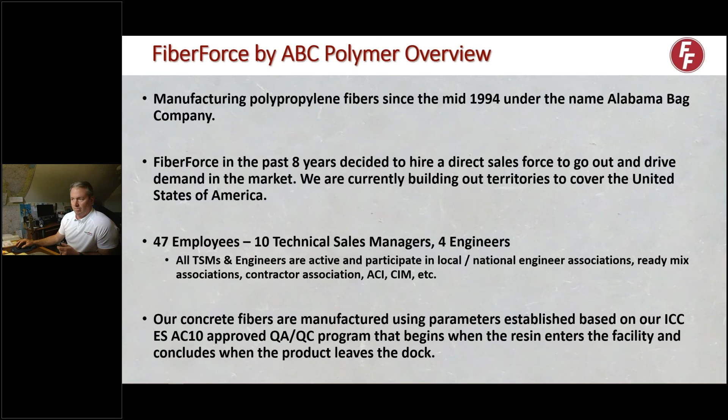We are a manufacturer of fibers, and that's all we do. We've been doing it since the mid-90s. We actually made fibers for most of the admixture companies and just third-party bagged it. But about 8 years ago, the company decided to take a different direction and hire technical sales managers like myself to push the specifications to the design community and to the contractors. So we have 4 engineers on staff along with 10 technical sales managers like myself.

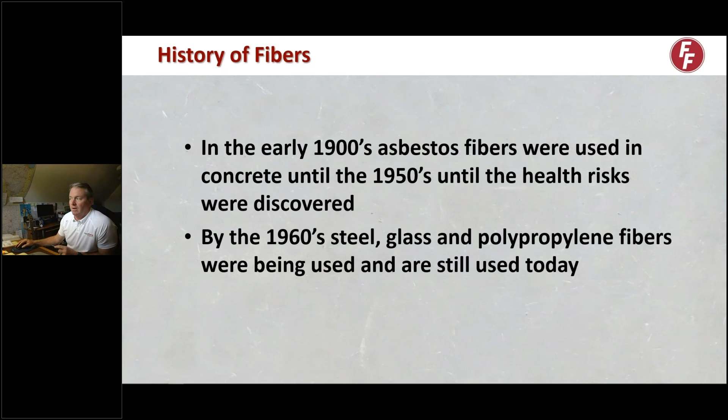But why? Because there are 3 absolutes in life. You will die, you're going to pay taxes, and guaranteed your concrete will crack. There are crack addicts out there that like cracks in their concrete, but most of us would like to control that. So typically, why does your concrete crack?

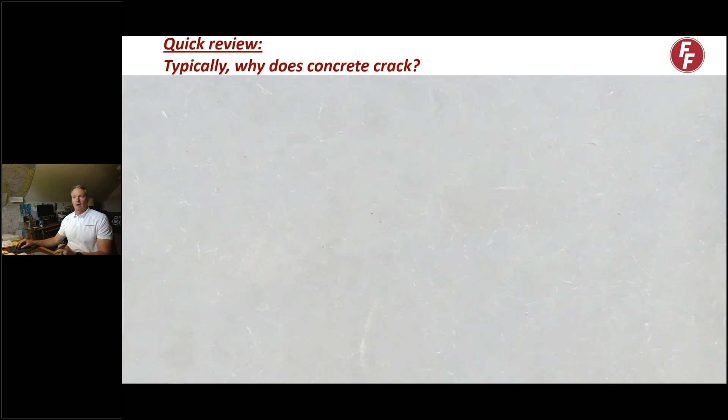There are really 2 main reasons. The first is shrinkage, and the other is restraint.

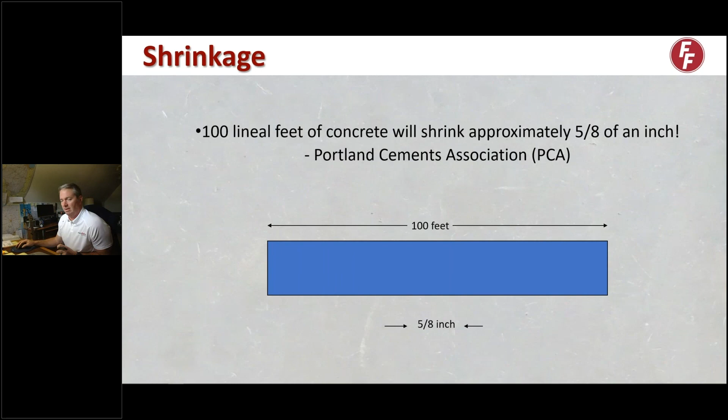So does anybody know this famous quote? Of course, no one can answer me because you're all muted, but it's our friend George Costanza. Basically, what I'm saying here is that the Portland Cement Association, the PCA, says that over 100 lineal feet, your concrete will shrink about 5/8 of an inch. But again, that's not why it cracks.

It's because of restraint. If your slab was on rollers or suspended in space, you wouldn't have cracks in your concrete. Other reasons include water of convenience. If you see a finisher out on a job site with a bucket and a brush blessing the slab, you're going to have some issues on the surface.

Improper jointing, meaning the joints aren't cut deep enough, or too narrow, or too shallow. Also the joint spacing—if it's too wide or too narrow, you're going to have cracks jump out of that joint pattern. We talked about restraint. You've got wind, low humidity that will contribute to cracks on the surface, along with high temperatures. Now I have poor subgrade there, but that's not the vertical cracking I'm talking about with shrinkage. That's horizontal.

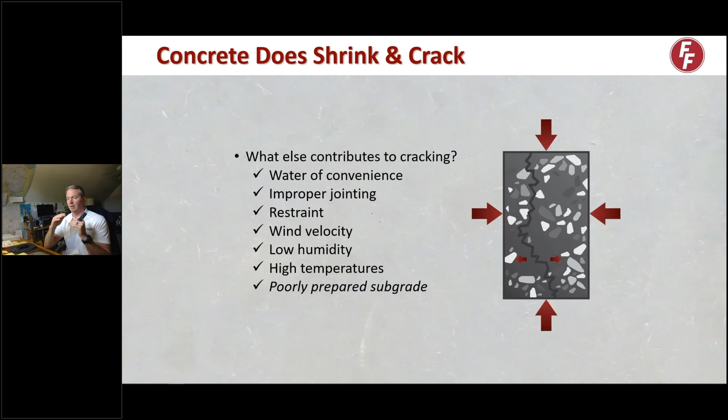But here's my biggest challenge as a territory manager: break tradition. I've got folks that swear they need steel reinforcement in their concrete. The fact of the matter is that on flat work, whether on grade or up on composite deck, the steel reinforcement in that slab is there for secondary reinforcement, not primary. Secondary meaning it is there for crack control and containment.

But why consider fiber reinforcement? I call it the 3 Ps: performance, productivity, and profit. We'll get into these reasons in more detail.

So why are we reinforcing slabs? Again, we're there not to ensure there won't be any cracks, we're just there to make sure those cracks are held good and tight. A big thing in my world as a fiber representative is to extend the joints. Again, we're not there to prevent cracking, but to maintain slab tolerance and impact and fatigue resistance.

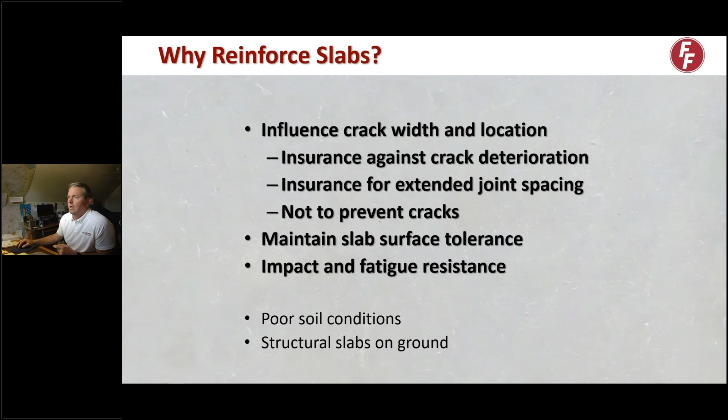When we're talking about impact resistance, shatter resistance, improved fire performance, we see this in a lot of shotcrete applications. What happens there is when water freezes, it expands 9% of its mass. That's why on the bottom of water bottles there are little dimples, so when it does freeze, it expands and doesn't explode that bottle. That's why we put air entrained concrete, or air entrained admixture, in exterior concrete for freeze-thaw. Well guess what? That's the same thing that happens when concrete is exposed to fire. That water or moisture in the concrete will expand and create more of a hand grenade explosion.

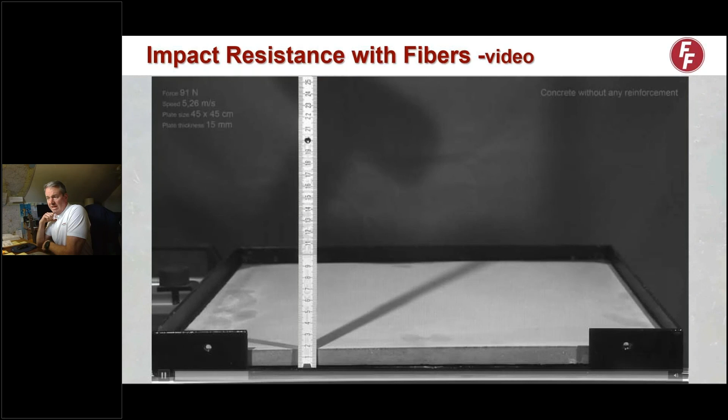So we'll get into some examples there. This is a sample of impact and fatigue resistance. It's a very thin sample, and the hammer is being dropped with just gravity. There are no fibers in this sample, and it kind of looks like that Ford commercial at the end where the logo drops on top of it.

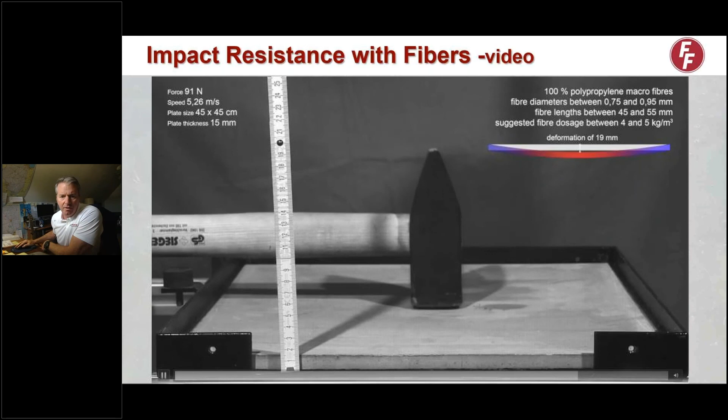The next sample is the same size, but it's got some macro fibers in there. Essentially what's happening is the fibers are absorbing the energy of that impact. So when you take a look at any type of environment where there's impact or fatigue resistance, fibers will help with that in your slab.

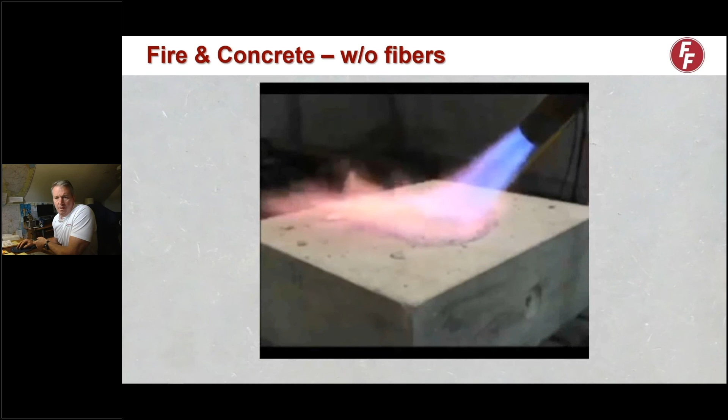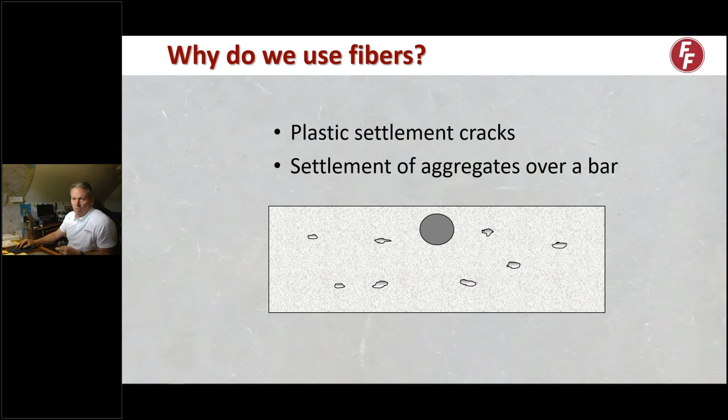Settlement. We also know that with concrete, under gravity, the coarse aggregate will settle. Here's an example of traditional reinforcement where we've told it to go ahead and crack. What we have is a void here, and that's where the moisture will gather and start eating at the steel reinforcement.

What will happen with fiber is you will get a uniform bleed. So if you're on a slab, you're not chasing the bleed water like you typically would with a non-fiber reinforced slab. The other thing is it will take a little bit longer to get the bleed water to the surface - I'm not talking hours, I'm talking have another cigarette and a soda and then get on it, because all that water's got to go around the fibers that are in the concrete.

The Wire Reinforcement Institute will tell you that the traditional secondary reinforcement, the steel, needs to be in the upper third of the slab, and it needs to be uniform. The reason is when the crack happens at the surface, it's looking for relief, so it is looking down. And when it gets on and grabs onto the traditional steel that is in the concrete in the upper third of the slab, it will stop opening up.

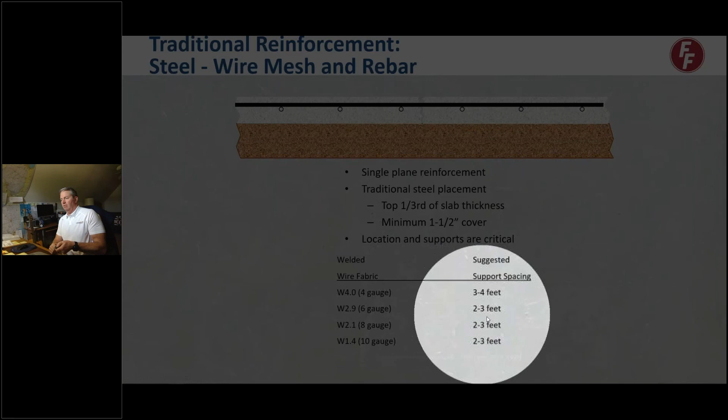Well, in order to get it uniform and in the upper third of the slab, you need to chair the steel reinforcement every 2 to 3 feet, and typically that never happens. Whereas the reinforcement is always at the bottom of the slab, that crack is looking for relief, and it finally finds it at the bottom of the slab. That means the crack has opened up nice and wide for a lot of things to happen.

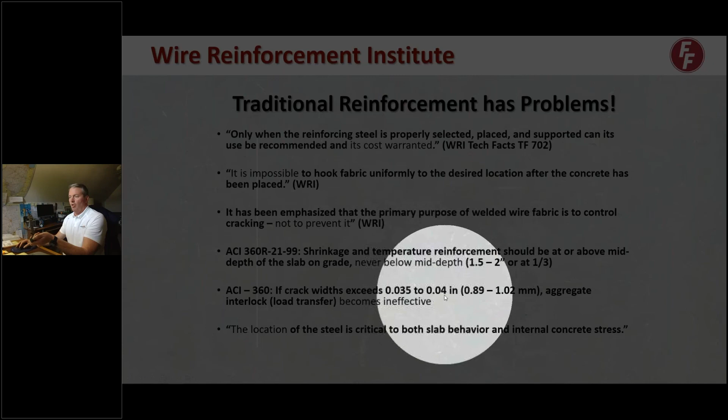What this slide will show you is that ACI 360 says that if the crack opens up more than 0.04 inch, you start losing aggregate interlock. The Wire Reinforcement Institute also says that it is impossible to hook up the traditional reinforcement, the steel. The nub on the end of a come-along, you might as well snip that off, because there's no way you're going to grab that wire and pull it up and have it be exactly in the upper third, let alone uniform.

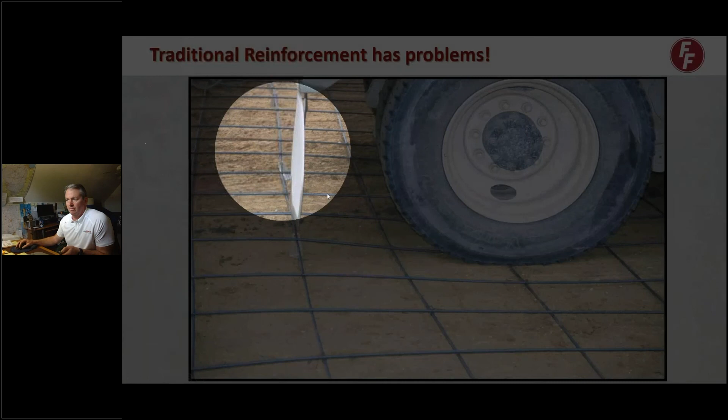So here's an example of a job site. You're going to have construction traffic on it - this is probably a ready-mix truck. As you can see, I'm counting 1, 2, 3, 4 supports. Everywhere else, it doesn't appear that there are any. If you look right there, that support is leaning and probably will fall as soon as the weight of that tire gets on there. Obviously this sample is a poor subgrade issue, but that is something that can happen.

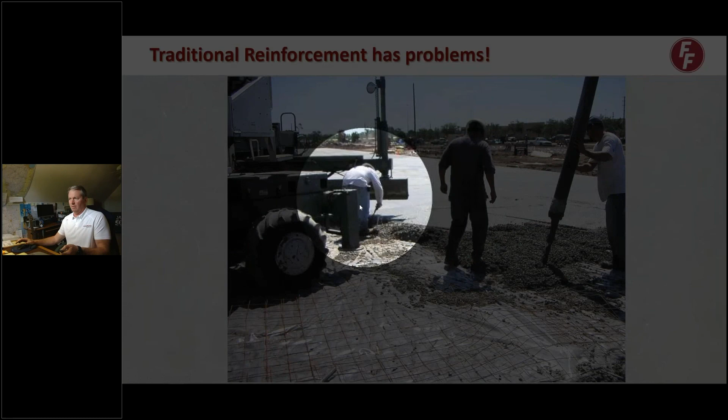This is a laser screed. They're fantastic pieces of equipment - they've really revolutionized the placement of mass concrete. You can really discharge a bunch of concrete in front of that machine and it can blow and go. But unfortunately, in this photo, if you look at this gentleman here, he's got the welded wire caught in his auger, so he's got his tin snips and he's snipping that out.

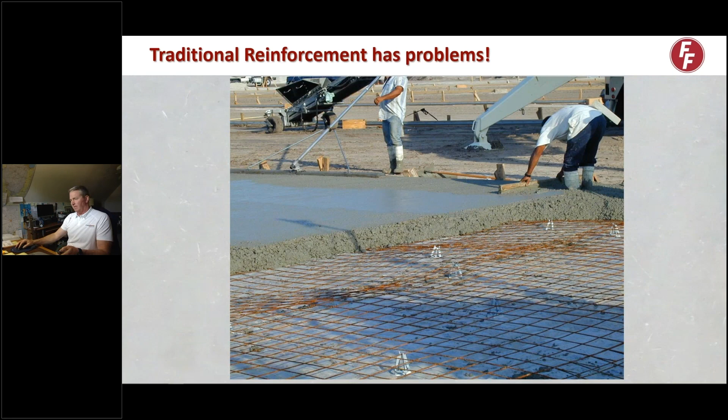And there's some space, so there's not going to be any overlap of the reinforcement. So you've got them just stomping that down and off they go. This looks like a 6x6 square, and that's probably a 4-gauge mat of welded wire, and they're chairing it, but the weight of that concrete is pulling it down. They finally stop trying to wrestle with it, and they kick the supports out, and the laser screed is off and going. So there it is at the bottom of the slab.

This is obviously way at the bottom of the slab, so much that it's getting buried in the subgrade. This is a complete waste of money and isn't doing anything for crack control. It's there because their great-grandpappy and their great-great-grandpappy had steel in concrete to make it stronger, and they don't understand the reason why that is there.

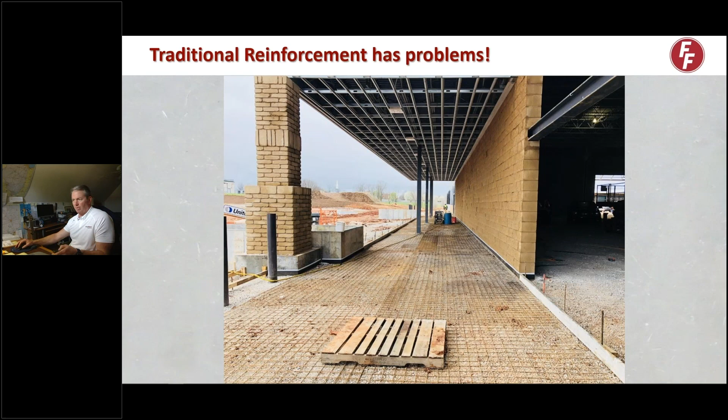This is a Walmart, actually - it's a sidewalk outside of a Walmart. That's a 4x4 square by 4 gauge, obviously very expensive, and it is on the bottom of the slab. I'm not seeing any supports or any effort to chair that properly. And again, complete waste of money.

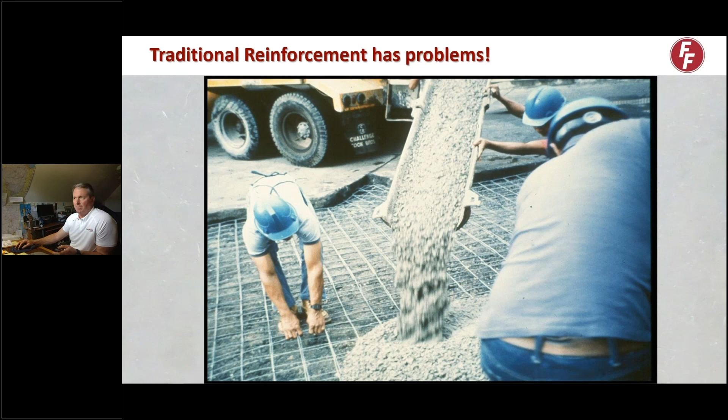Even up on composite deck, they've got supports there, and that 200+ pound individual, when he steps off that welded wire, it's not going to jump back into place. This guy's a chiropractor's dream - he's standing on 2 mats of rebar while he's trying to pull them up. Again, virtually impossible and not going to happen - another example of waste of money.

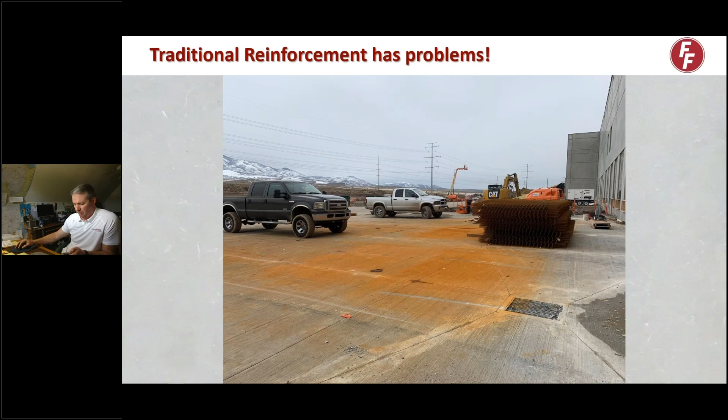This crew decided not to even mess with the welded wire. They went ahead and put it underneath the visqueen - so talk about a complete waste of money. This is a prime example. And I got this because the welded wire is always one of the first things to show up on the job site, and it never is freshly galvanized when it gets introduced to the concrete. In this example here, that rust is going to be virtually impossible to get off that slab.

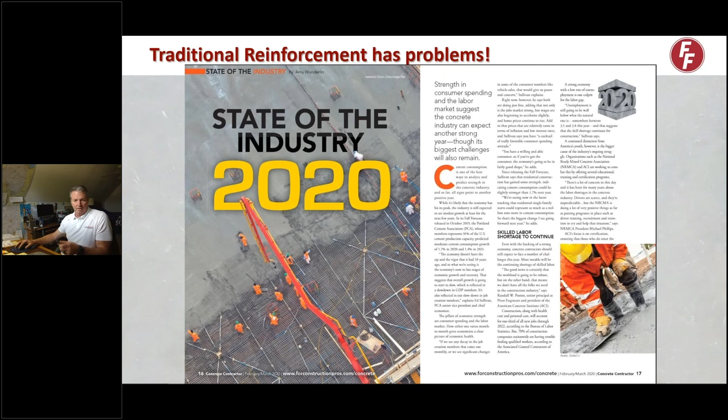This is also from For Construction Pros - it's talking about the shortage of labor. So I'm getting some requests because there is a shortage of labor to go ahead and use fiber reinforced concrete, because they can't find the individuals to come out and either tie the mats of rebar, let alone drag the welded wire and place it on the bottom of the slab. So I guess why deal with those types of issues? Why not go ahead and have it furnished and installed in the ready-mix truck?

It does come in water dissolvable bags, so when it calls for 3 pounds or 5 pounds per cubic yard, if the driver puts in the proper amount of bags, I can put my hand on the Bible and say there's enough fiber in there to satisfy the requirements of the design engineer. ACI 360 does recognize the use of polymeric and steel fibers for well over 30 years.

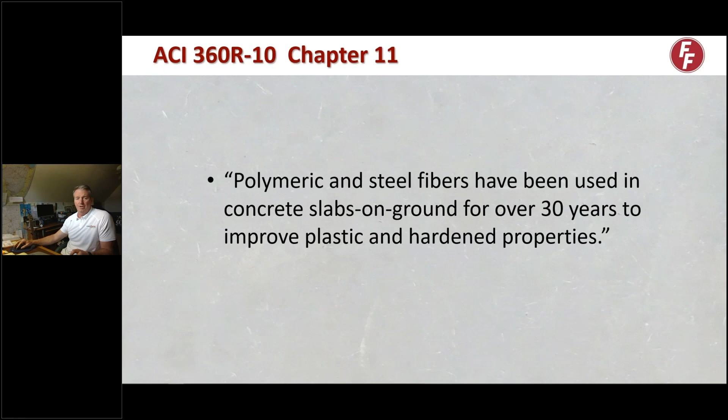But let's go ahead and take a closer look at fibers in the concrete. So if you get anything out of this presentation, just know that there are basically 3 types of fibers: a microfiber, a macrofiber, and a steel fiber. Micro, macro, steel. Now, when you take a look at the micros, there are 2 types of micros.

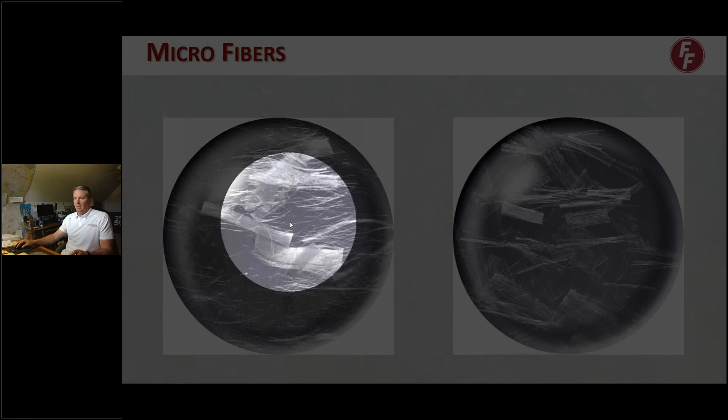There is a monofilament, which is this sample over here, and essentially the fibers are mono, meaning singular, and in a microscope they look like a smooth dowel. So you and I, pulling on a smooth dowel, it's going to come out of one or both of our hands, and that's what it does in the concrete. Typically I see the dosage rate for the monofilament at 1 pound per cubic yard, and the applications are such like a garage slab or a basement slab. Now this other sample to the right is a fibrillated fiber, and as you can see, it's like an accordion.

As it gets mixed through the concrete and grabs onto the coarse aggregate, that accordion expands. At 1.5 pounds, the fibrillated fiber can replace the 6x6 W1.4 or the 10 gauge welded wire. That's where I'm seeing the 1.5 pounds of fibrillated fiber being used: sidewalks, driveways, those types of applications. So remember, micro, macro, and there are 2 types of macro.

There's the tape fiber, which is this sample over here, kind of looks like shredded masking tape, and then there's the stick fiber. The tape fiber, typically the minimum dosage rate we see is 3 pounds, and at 3 pounds per cubic yard I can replace 6x6 W2.9 by W2.9 or the 6 gauge welded wire. The recommended dosage rate for a macro or tape fiber is 3 to 5 pounds.

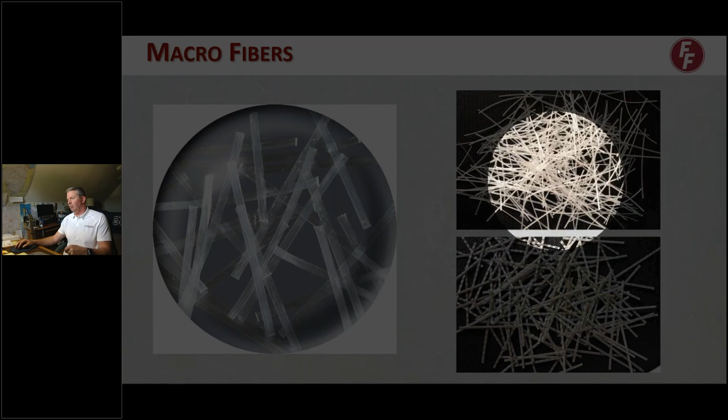3 pounds is about the size of a couch pillow. Once you start getting into the 5 pound range, there could be some mixability issues and finishing issues that might steer you towards the stick fiber, which is this over here. The dosage rate I see utilizing the stick fiber is 5 to 10 pounds.

When you're talking to your ready mix producer and you're at the 5 to 10 pound range, there's got to be some discussion with the QC department on the mix design to make sure the mix is optimized to the use of macro fibers, and that's where your fiber representative can help you out.

Micro, macro, and steel. Like the micro and macros, there are 2 types of steel fibers. There's the type 1 fibers, which are these 2 here, and there's a type 2 fiber. The type 2 fiber is a stamped fiber, and I typically see that in light commercial applications. Minimum dosage rate for steel fibers is 25 pounds per cubic yard.

With that stamped fiber, if you take and bend it in your fingers, it'll bend and break real easy, and that's where I see it used in light commercial applications. Whereas the type 1 is a cold drawn steel fiber, and I see that in more heavy industrial applications. Taking that in your fingers and trying to bend it, it's very, very difficult. So I see that like in steel mills.

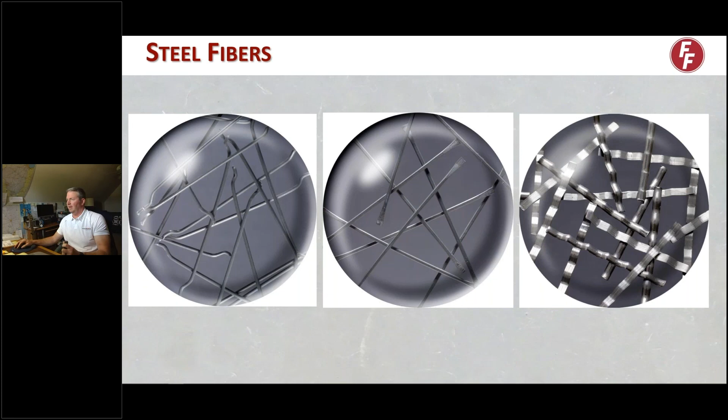The most I've done is 89 pounds per cubic yard. My European counterparts kind of laugh at that because they're over 100 pounds per cubic yard. But they also don't utilize the macro fibers as much as we do in the States, and they're more accustomed to mixing and finishing the high dosage of steel fibers.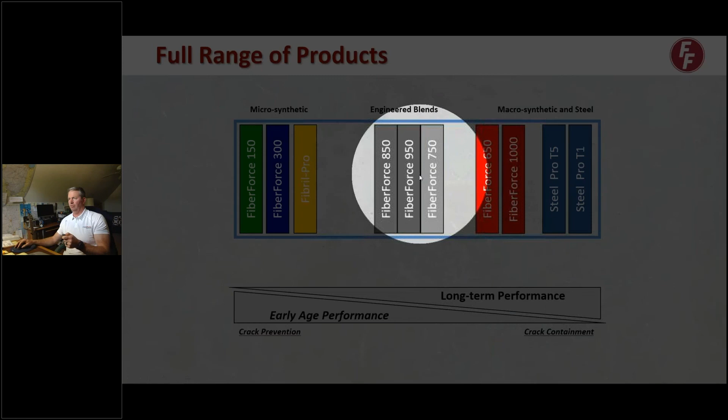When you take a look at the line of fibers, again, micro, macro, steel, there are some blends, which basically take a look at the micros having the early age performance, the first 24, 48-hour temperature plastic shrinkage, and then you've got the long-term performance, which is the crack control and containment. With the engineered blends, you get the best of both worlds, the micro-macro blend or the micro-steel blend.

Again, there's no obstruction to the sub base. It's ease of placement, you can go ahead and discharge your trucks right on grade. Safety is a big thing. You've got your EMR ratings that facilities such as BP, Eli Lilly, ArcelorMittal require your EMR rating to be at a certain rate or below.

Once you go above that EMR rating that is their threshold, you're not allowed to do work in their facility. Certain things like cuts, scrapes, and back issues with traditional steel are chipping away at the EMR rating. So again, there's always safety, but fiber is positioned where it will be compliant with the code. We can reduce labor costs, so there's no rod busters out there.

It is furnished and installed when it shows up in the ready mix truck. I can speed up your construction schedule, not having to wait on rod busters to tie mats or rebar, or drag the welded wire out and put it on the bottom of the slab.

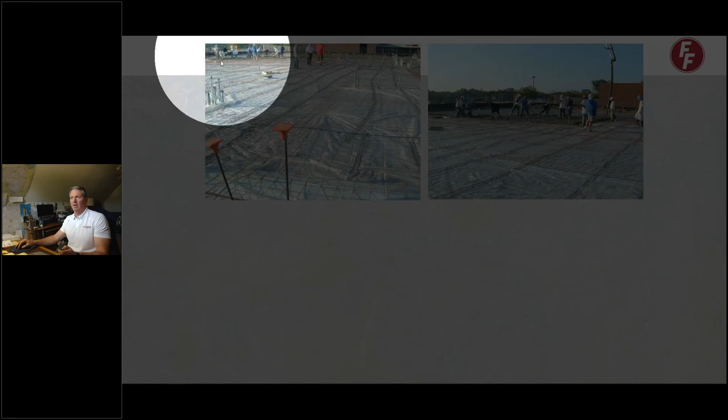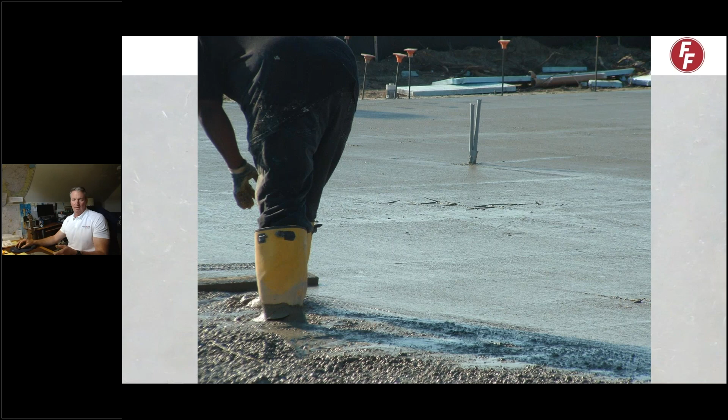So let's take a look at a couple welded wire projects. This one here, you can kind of see that in the beginning they were placing it okay, and then they kind of got away from the 2 to 3 foot spacing. Essentially what will happen is you'll have this issue where the wire pops up because of the weight of the concrete and the overlap. So now there's an issue that the finisher will have to go out there and stamp that down or snip it out, and when they do that, then you've got some issues of overlap or lack thereof.

Safety on this project - they were cutting this all in one cut, the 6x6 2.9 welded wire. They're putting it in a sidewalk, and again, that's a safety hazard. There was no eye protection at this time. So again, look at your EMR rating.

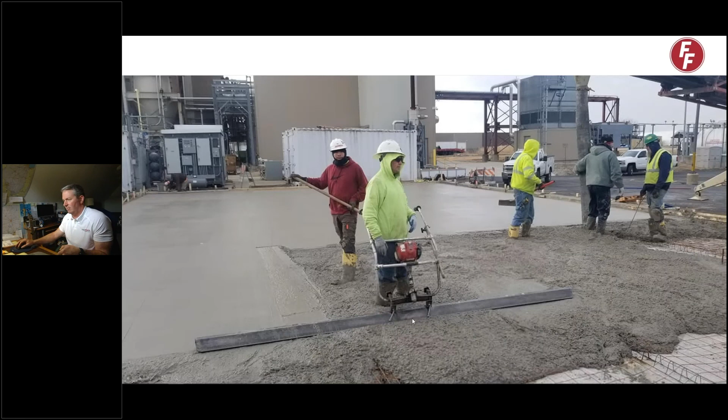Here's another job where they go ahead and have the expense of bringing the chairs out there, but the welded wire is not supported - the chairs are not at the 2 to 3 foot spacing. Here they are going ahead and placing it, and as you can see over in the corner, the weight of the concrete is just lapping it over the chair. This is an application that is a complete waste of money with the welded wire.

One of the first things to show up, it's rusty, and here is an example of them dragging it through the mud as they bring it on in. Again, back issues, cuts and scrapes.

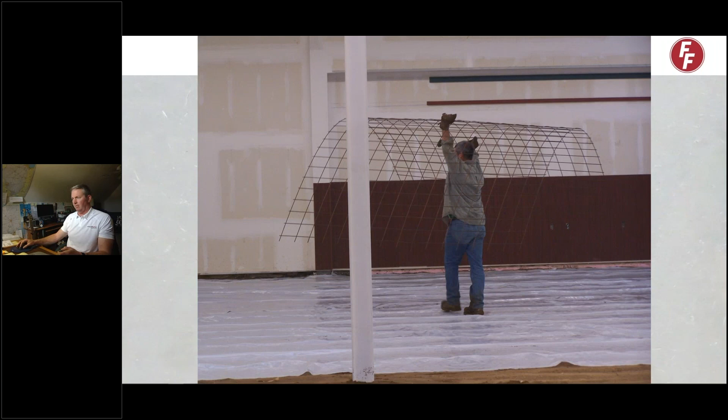This guy is double productive, carrying double, or 2 mats, of welded wire. They're plopping it down. This guy looked like a bald eagle as he was walking across the visqueen with that flopping in the wind. And here they are flopping it down, and those Georgia buggies are ready to go.

And I see no attempts to get that off the subgrade, so that's where it's going to stay. That, in my opinion, is a very, very expensive way of holding down visqueen. You might as well take the owner's wallet and bury it in the concrete, because again, it's a waste of money. And I can tell you it's going to look like that at the bottom of the slab.

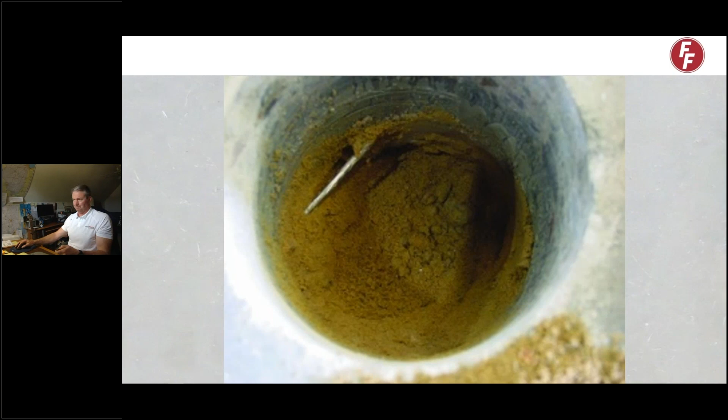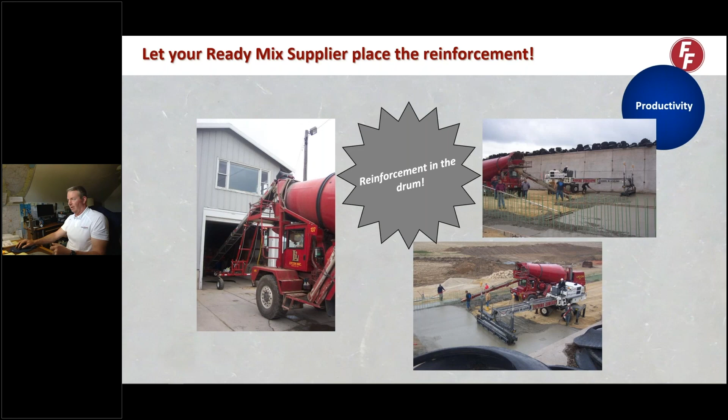So then there's this application - well, geez, they're even taking the effort to bring the welded wire. And to me, why even mess with it? If you're going to form that up like that, why even add the weight of the welded wire? So have it furnished and installed in your concrete instead. Placing it, you don't need any new equipment.

But there is always the number one question I get with fiber reinforcement, and that's, what about the hairy surface? On the higher dosage rate or the lower dosage rate, we typically don't see much issue with fibers at the surface, but there is a technique, and it's not very difficult.

It's basically you strike it off and you wait till that bleed water leaves. I can walk a slab, and if it's real hairy, that means they got on it too soon before the bleed water left that surface, and the cement hadn't had time to grab onto the fiber and hold it down. When they were doing their finishing practices, essentially all they did was comb the slab.

Now, that is not the end of the world. You can come back and burn that off real quick. Another technique when you get into a higher dosage rate of fibers is to use a roller jitterbug. After you bull float it, you come back and roll this across the top of the surface, and that will knock those fibers down. Then you throw another bull float finish on there.

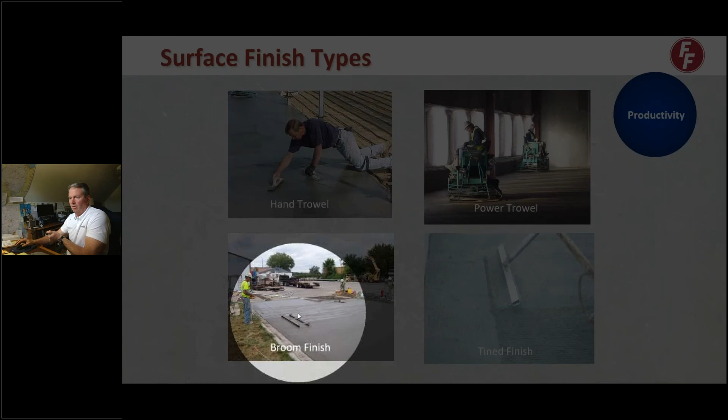But again, the key is to wait for that bleed water to leave the surface before you start your finishing practices. Again, your finishing types - you can hand trowel it, power trowel it, broom it or tine it. When you're brooming and tining it, waiting as long as you can is most important. And when you broom it, don't broom it two ways. If you're pulling it like this example, only pull it one way - you pull it back the other way, you will comb the slab. You will see some hairs stick up, but it's not the end of the world.

It's an exterior pavement - the sun, the effervescence will help get rid of that, along with your snow plows, so that if you come back after a winter, you're not going to see the fibers on the surface.

Now, I have made some claims that X amount of pounds replaces Y reinforcement. The fiber industry is measured by a number of different tests. There's two main tests - one is the ASTM 1399, which measures residual strength, and then there's the ASTM 1609.

The real difference between the two is that this sample is a beam of this size, and it's 3-point loaded, but they've got a steel plate underneath there, and they apply the PSI to the top of that until it initiates that first crack. Then they remove the steel plate and continue to apply PSI down until that piece is in two pieces, measuring over a number of samples how long it took and how much deflection occurred to come up with an average residual strength.

The 1609 again measures the flexural strength. There is no steel plate. It is 3-point loaded, but they apply PSI, release it, apply more PSI, release it, et cetera, until that piece is in two, and they come up with an RE3, or a flexural strength ratio.

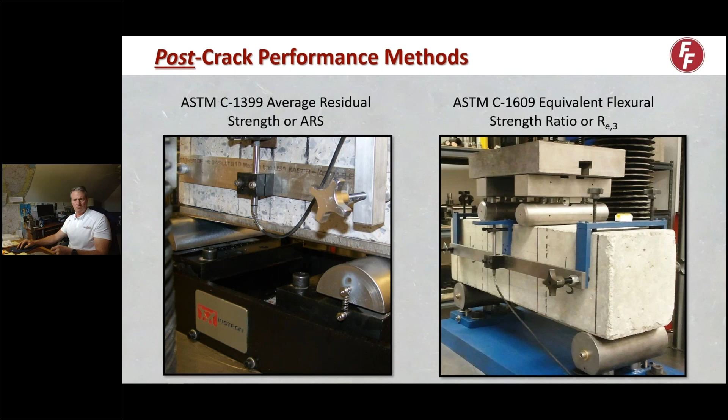The most common one that we see is the 1399. That comes up with the average residual strength, and here it is with the steel plate. The crack is initiated here, and then they measure again the deflection, and they stick it into a fancy formula to come up with the average residual strength.

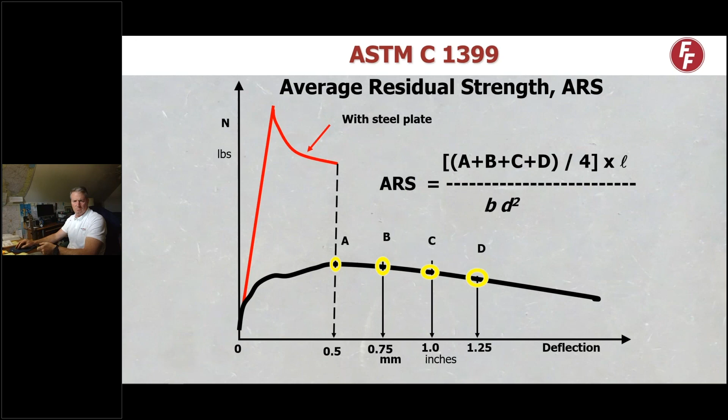Another thing to keep in mind is that fibers do not hurt, nor do they help compressive strength. We are there for crack control, not compressive strength. So you could have a beam of like 5,000 PSI compressive strength, but if it doesn't have any fibers in it, it has zero residual strength. When you start adding fibers is where you start getting that assistance and that crack control, or residual strength.

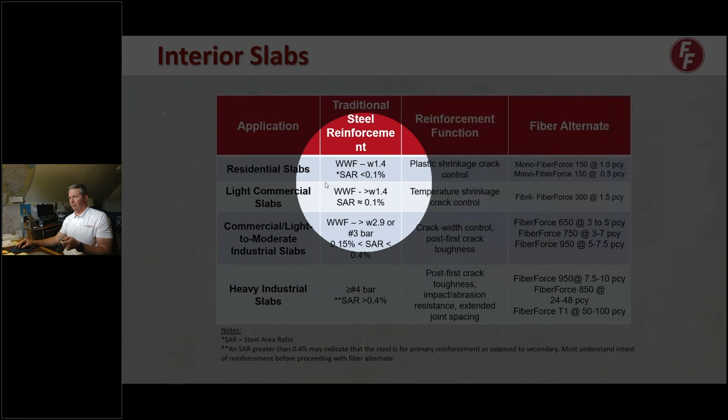Again, when you take a look at the full range of products and applications: residential slabs with the 1.4, we've got some options for you; light commercial with the 10 gauge welded wire, or you get into the 6 gauge or rebar for heavy industrial slabs.

Another application that we're in is state DOTs looking at overlays, whether it be 4 to 6 inches. They're going right over the top of asphalt in mainline pavers, at anywhere between 4 to 5 pounds of the macro fiber. There are no dowel baskets because they don't make them that small, and with the miles they're doing for the overlay, it would be very expensive to have dowel baskets. So they are going with the 5 pounds of macro.

Then there's also topping slabs. When you're looking at over PT slabs or precast, going 2 to 3 inches over the top with traditional steel in the upper third is nearly impossible. So we are in quite a bit of topping slabs.

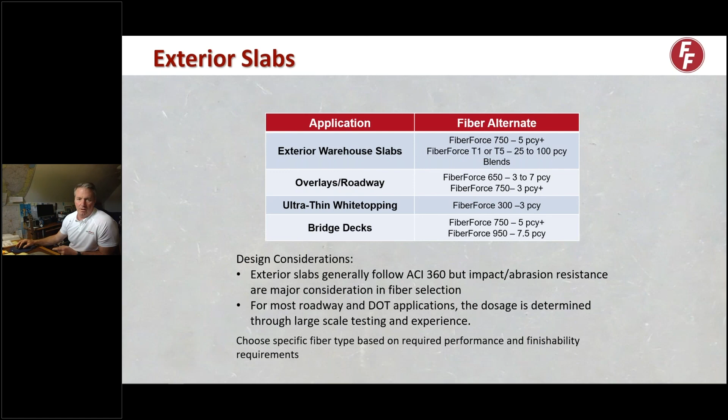Bridge decks - we are not replacing anything in a bridge deck, we are just extending the life of that bridge by holding the cracks tight. So when you look at applications like Oregon, they've got it in their specifications that the cracks that come off the vents, the corners, prevent the de-icers from getting down into the reinforcement and corroding it. Also, the studded tires they have out in Oregon and the slam drag of a snowplow - we're able to help with that impact and fatigue resistance and maintain the integrity of that bridge a lot longer.

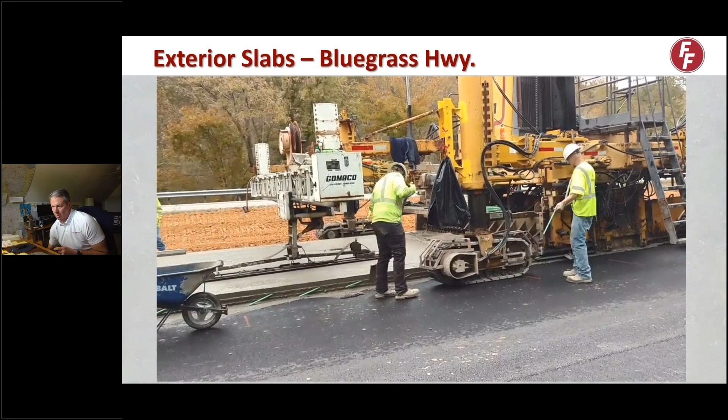Here's an example of an overlay that we did in Kentucky, and this was 5 pounds per cubic yard. As you can see, there are no dowel baskets - they're going straight on top of the asphalt. The thing they did learn pretty quickly is that the amount of saws they need out there needs to be increased - as a matter of fact, more than doubled - because at 6 inches, that piece of equipment there can lay some concrete real quick.

My number one sales tool, though, is my calculator, because when you take a look at comparing the welded wire to the fiber as far as cost, you're looking at the fiber being bid per cubic yard, and the welded wire or steel always being bid per square foot. So when you take the 6x6 by W1.4, or 10 gauge welded wire, and you put it in at 18 cents per square foot to furnish and install it in a 4-inch thick slab, that's going to cost you $14.58 per cubic yard. Essentially that's because in a 4-inch slab, that covers 81 square foot per yard.

But let's flip it and reverse it. You've got 18 cents per square foot for the 10 gauge welded wire, fibrillated at 1.5 pounds - WAG number is around $10 per cubic yard. Obviously as the slab gets thicker, the fiber gets more expensive because we are throughout the matrix of that concrete. But even at 6 inches, we are very, very competitive, and it is guaranteed to be in the right location.

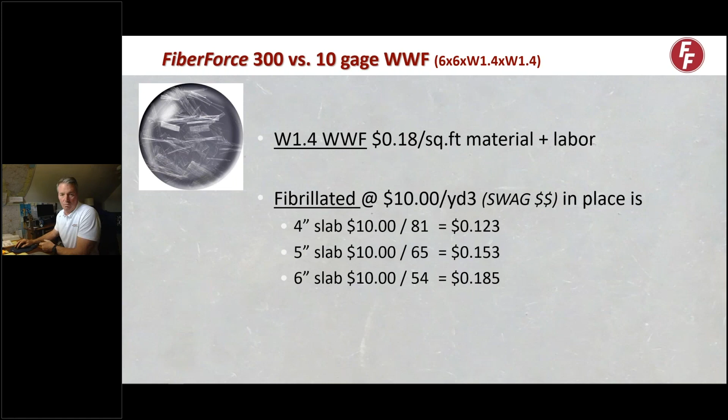Again, taking a look at the full range of fibers, there are certain contractors I do not want my fibers in because they will not listen. And this is the type of crew that I would much rather have their fight with welded wire, because they're not going to listen.

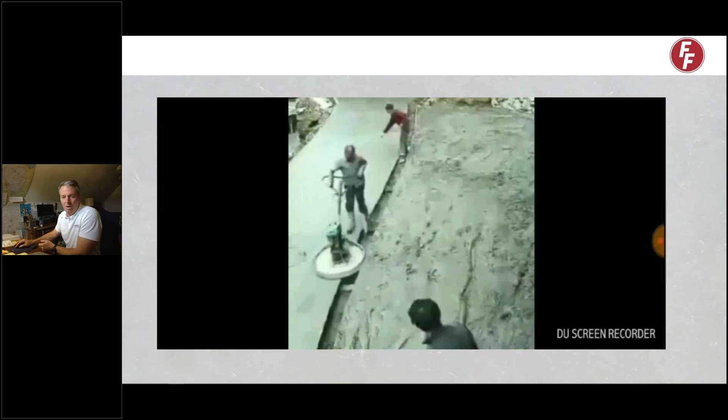All you need to do is take the recommendation of your fiber representative and listen to their finishing techniques, because there are good cooks and bad cooks out there, meaning contractors. The cake mix is the ready mix concrete, and when it comes out, it could be the Betty Crocker cake mix. Person A can make it taste great. Person B can burn it and not taste great.

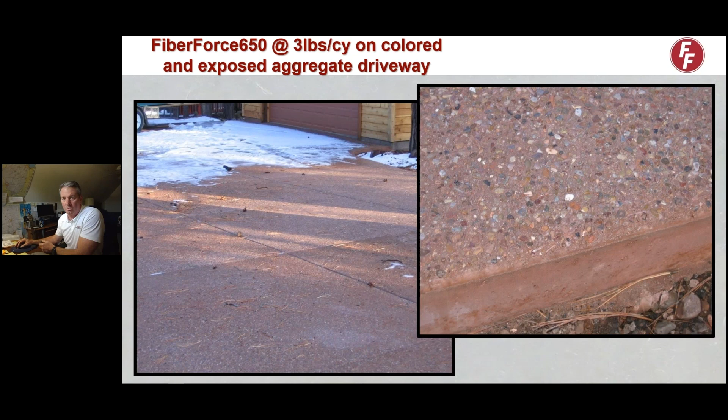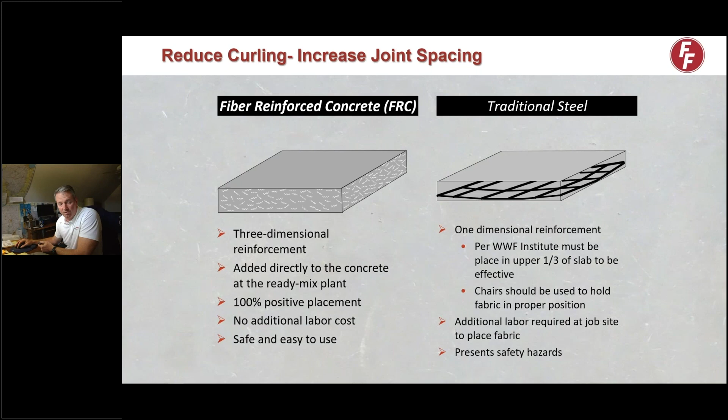We are 3-dimensional as far as fibers. They're throughout the concrete as opposed to the 1-dimensional with traditional reinforcement. We are 100% going to be at where the crack occurs.

So I'm suggesting to go ahead and let it crack. What we're doing is holding those cracks good and tight, and you're going to cover it up and it won't be visible anyway. If it's in my driveway, yes, I want to control where that crack is. But if you're going to cover it up with flooring, what does it matter?

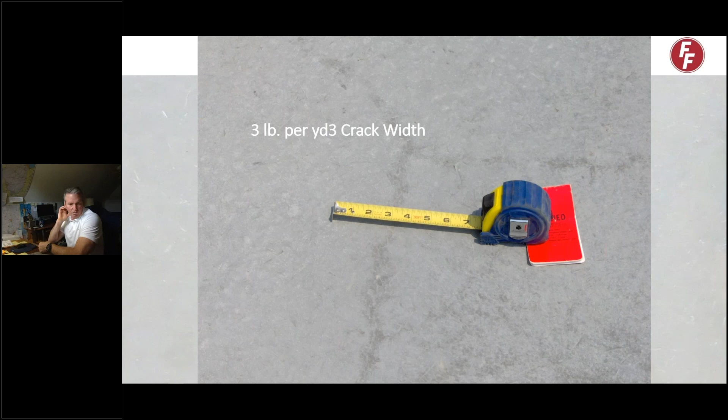So again, this is a sample. Look, there's some cracking - guarantees in life, remember - and where the concrete cracks, it immediately finds relief with the fibers and stops opening up.

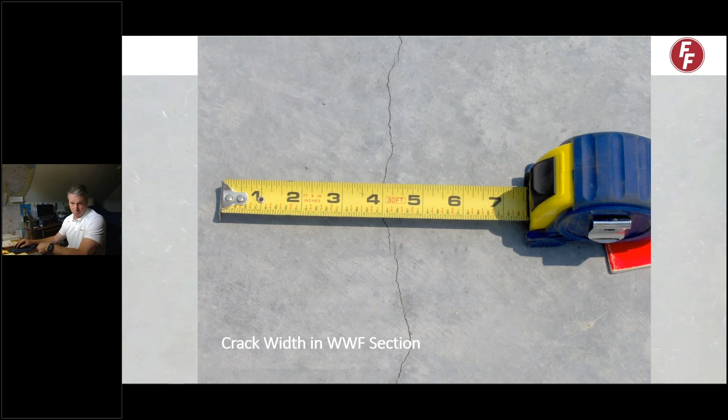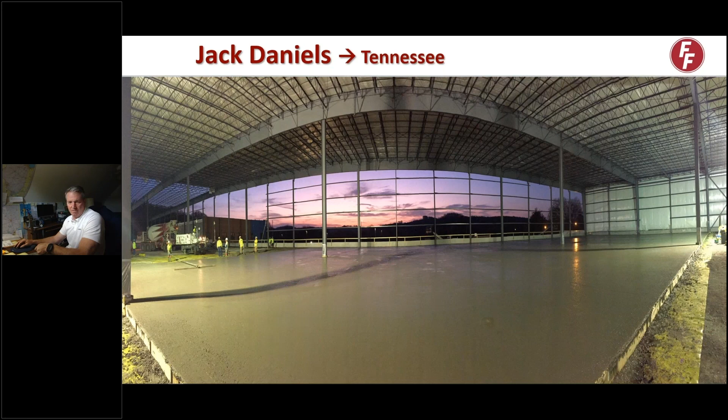Jack Daniels is at 7.5 pounds per cubic yard in their warehouse. Just last year, they're throwing macro fibers in their concrete because they recognize the utilization of fiber reinforced concrete. And then you take a look at the new hospital at Franciscan in Michigan City, it all has 4 pounds per cubic yard of a macro fiber in it, up on composite deck and down on the slab on grade.

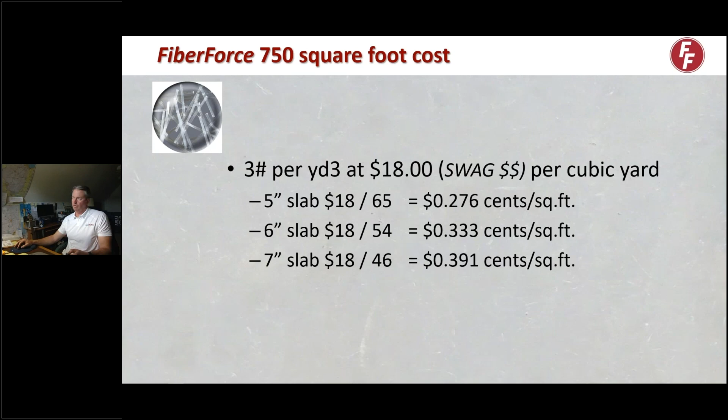Again, getting my calculator out, when you take a look at 3 pounds per cubic yard, that's $18 per yard in a 6-inch thick slab. That's 33 cents a square foot. And I don't think you can purchase and install 6-gauge welded wire for 33 cents a square foot and guarantee it's going to be in the correct location.

The Steel Deck Institute does recognize the use of fibers. The Steel Deck Institute design manual does recognize either 25 pounds of steel fibers or 4 pounds of macro fibers. So that's why we are in a lot of composite metal deck applications, because the Steel Deck Institute recognizes the value of fiber reinforced concrete on their decks.

However, if you're considering taking out negative moment steel because you have fiber in there, I will caution you on not doing that. The railroad ties there, or the negative moment steel on either side of that girder, is there because of the flex of that deck. If you do not have the negative moment steel, I guarantee you will have cracks on either side of that girder because of that flex of the deck.

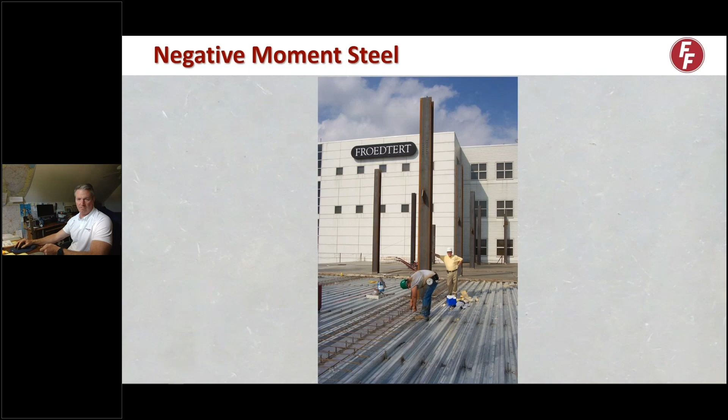Here's a project I was involved with back in '06, '07 for Duke Realty. This is a spec building that stood like this for a while because that's back when China was having their big building boom, and steel was in high demand there. They were having a hard time getting welded wire, and Duke finally asked for an alternative, and that was fiber.

The contractor actually gave money back because they didn't have to wrestle with the welded wire and install it on the decks. Duke had me come in along with the producer and contractor to give a presentation not only to their construction project management, but also their realtors, because they noticed the cracks off the corner of the columns were drastically reduced, and if there were any, they were held good and tight.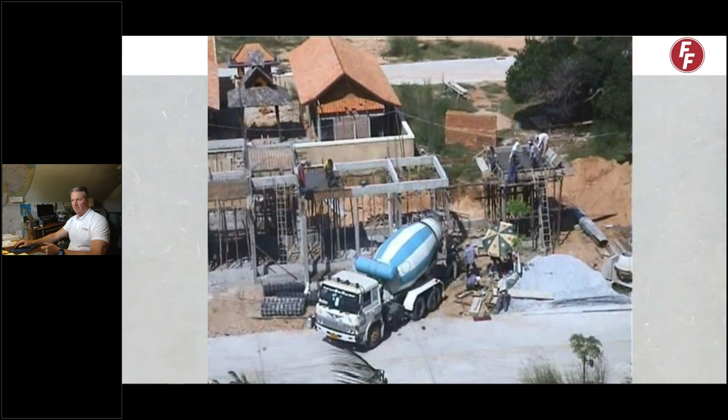If you watch this gentleman here, he's got a bucket and it flips in the air, and this gentleman up top here grabs it and places it. So pumping that way, there's no issues. Or if you choose to pump it this way, you shouldn't have any issues either.

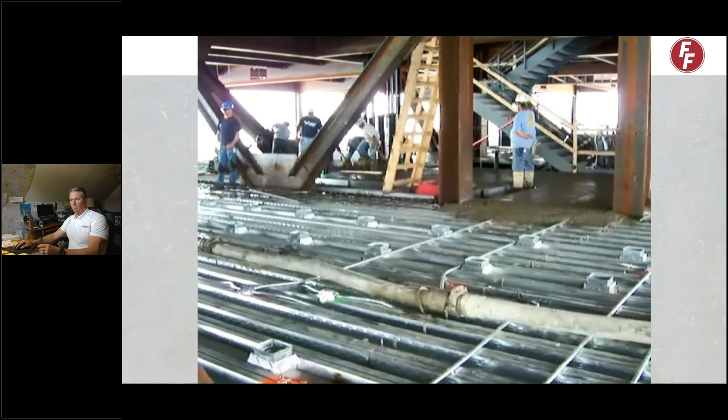I don't think they're doing an air test up on that deck there, but in all seriousness, here is the video for the Blue Cross Blue Shield building. If you notice, there's no obstruction, no tripping hazards with welded wire, and the gentleman with the gaff hook that moves the hose around has no chance of grabbing onto wire and pulling it up.

That guy on the edge there, you can see the negative moment on the edge. He made me real nervous, and this is about as close as I got to the edge. I'm not a heights guy, and again, that was up 71 floors.

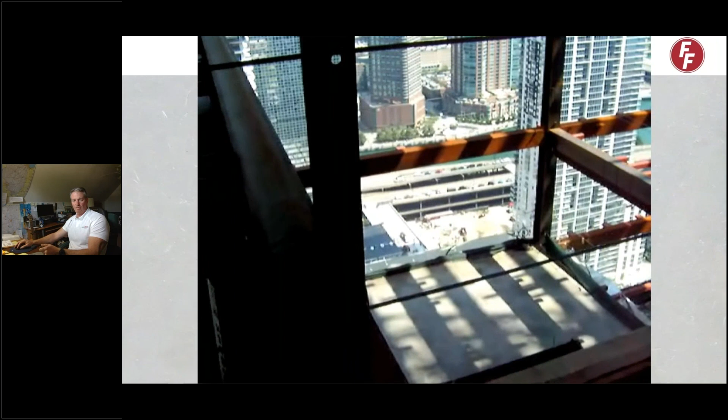I mentioned we have an engineering department, and we can either take an existing slab with the traditional secondary reinforcement and give a recommendation for dosage of fiber, or we can start from scratch. If we do that, we'd like to take a look at the forklift loading on that slab, or the post loads from the racks and the spacing of the plates, the dimensions of the plates for shear.

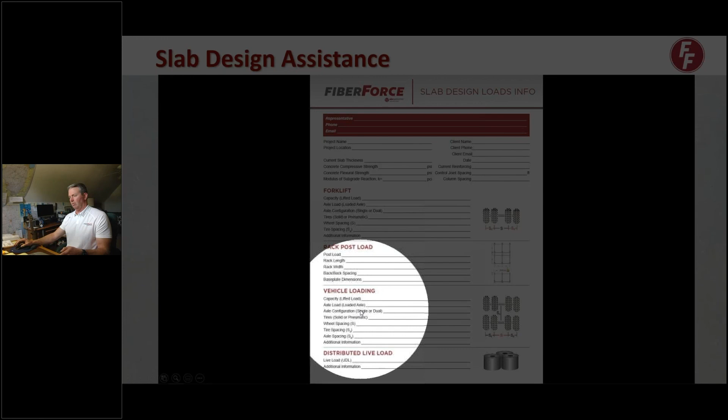We also want to take a look at the vehicular loads and the live load. Again, the big thing in my world is extending the joints. You might ask why, and it's because of that piece of equipment right there - the hard pneumatic wheel of that forklift. Where we joint it, it will curl, and that piece of equipment will run over that curled joint and start banging at it and opening it up. So what we've been able to do is extend the joints and get them into the column line. It's not as simple as throwing fiber in there.

We do have to optimize the mix a little bit and take a look at a few other issues, but we have been able to get out to 60 to 70 feet.

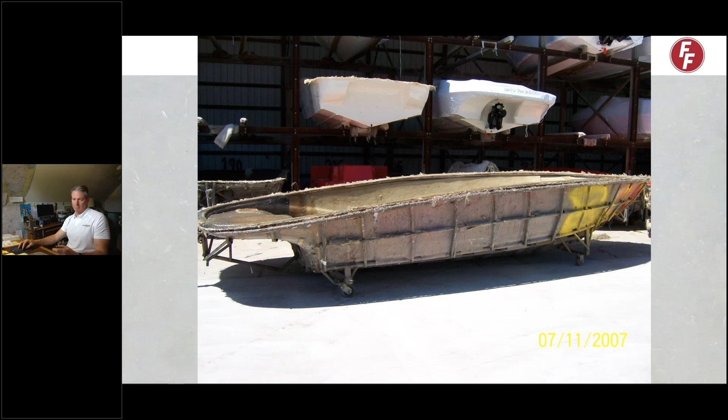Here's a sample of a job at Rinker Boats. They were having issues transporting the hulls of their boats with a rack system using steel wheels, and it was banging on the joint, damaging their product. So we went in and I suggested, let's not joint it, let's throw 5 pounds of macro fiber in there. The guy called me up and said, oh boy, it's cracked, you've got to come out and take a look.

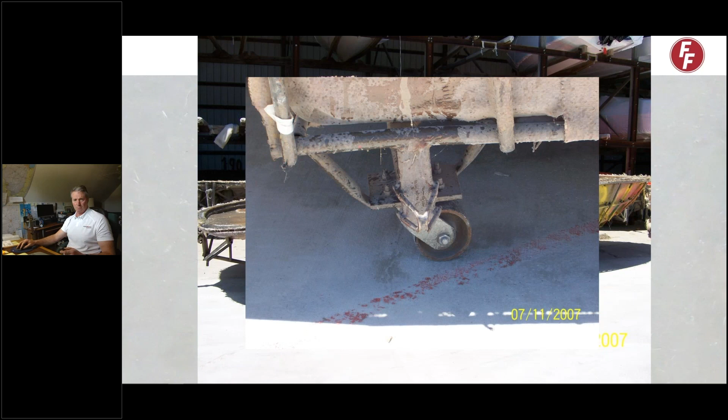I went over the 3 absolutes in life: it's going to crack. I threw my crack card down and said let's come back in 60, 90 days and measure it, then come back after the winter. The bottom line is that every time they do routine maintenance and tear out slabs, they're going jointless. Again, in my driveway I want to control where that joint is, but in an industrial application it's probably best to go jointless.

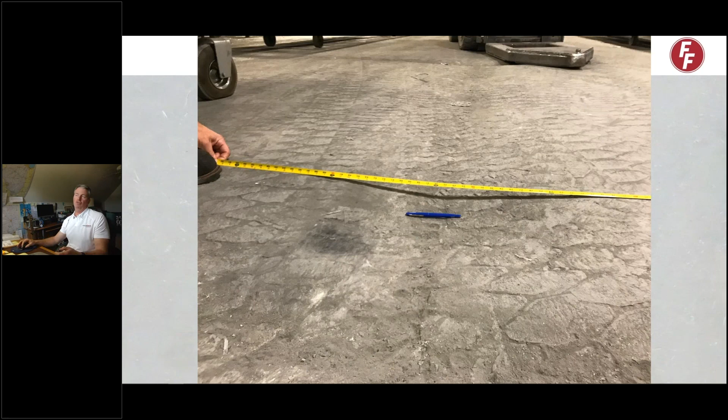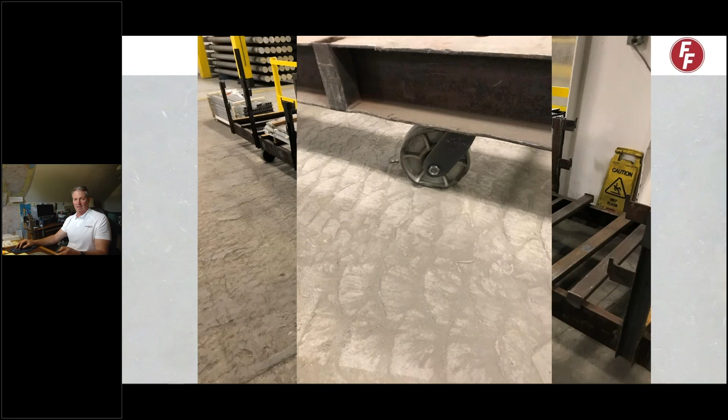Here's another example - an aluminum extrusion facility. That blue door is the oven. This is a 35-foot long bed, they also had an 85-foot and a 25-foot. This pen is sitting inside the joint, and as you can tell it's not even touching the top of the slab. Obviously this is a very dirty environment, but they're also transporting their product around with steel wheels, and going over those joints has chipped the wheels, and those steel chips act as grinding agents.

The problem is it goes over the joint and starts damaging the product again. So we came in with 7.5 pounds of macro fiber and were able to go jointless. The problem they had after we were done is they had to slow down the drivers, because they were so accustomed to it being nice and smooth that they were going a little too fast. But those are good problems.

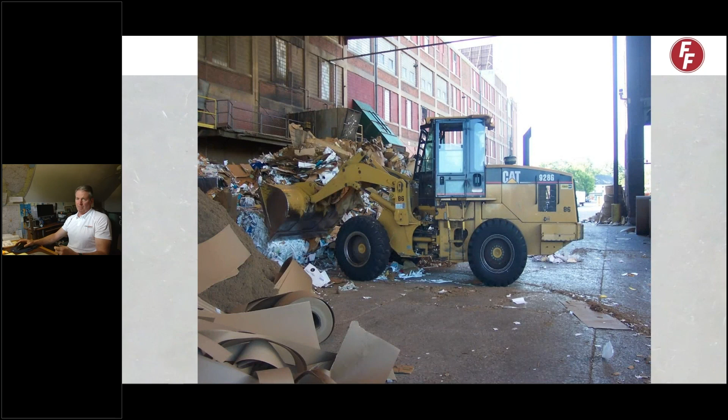This, in my opinion, is the hardest piece of equipment or application on a concrete slab: a waste transfer station. The slam drag of that equipment - drivers will swear they don't spin their tires, but when they go into the pile, they do spin their tires, and whatever's underneath acts as a grinding agent. Plus you've got whatever gook and everything dripping off the garbage that gets in those cracks and starts eating at the concrete and the reinforcement.

And I've seen them run on rebar. The issue is that garbage doesn't stop, so for long-term maintenance of their slabs to extend its life, we've been able to introduce fiber reinforcement to achieve that. I also want to look at rack loading - when you look at the joint pattern, we can assist because typically people want to put the joints underneath the racks since vehicles go up and down those aisles. But you don't really want to do that, because that's loading on either side of the panel and it'll pop in the middle. With our engineering department, we can look at your rack layout and help with a joint pattern for that application, taking into account the uniform load on the slab.

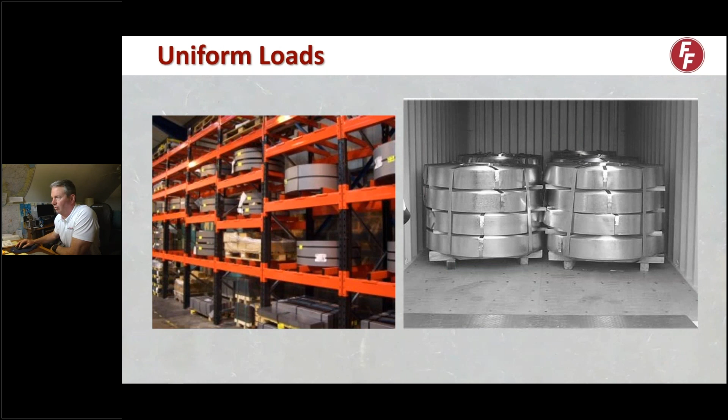So my distribution arm is the ready mix producers - we do not sell direct to contractors, but it's the ready mix producers that I go through. I also work with the design community and the contractors. I want to make sure the contractors, my good cooks, know what they're doing with the fiber reinforcement.

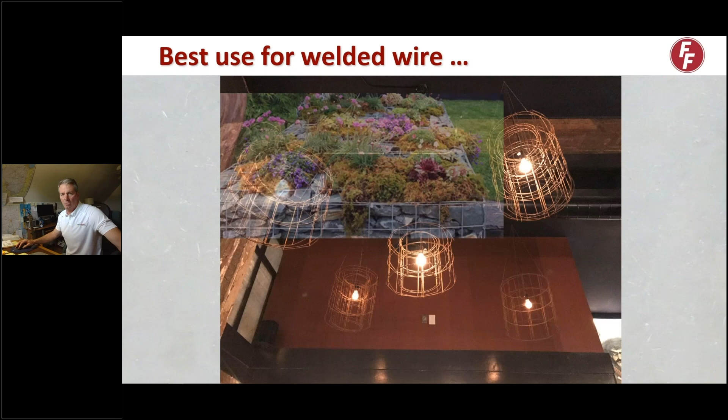I don't know, my wife says I'm not clear sometimes and I confuse her. I don't know if it came across how much I don't like welded wire or rebar, especially when it's on the bottom of the slab. But welded wire, I did find a good application for it - this was actually a Mexican restaurant real close to our factory in Birmingham. That's very artistic, or you can go ahead and throw it in some planters or retaining walls. But really, that's the best use for welded wire.